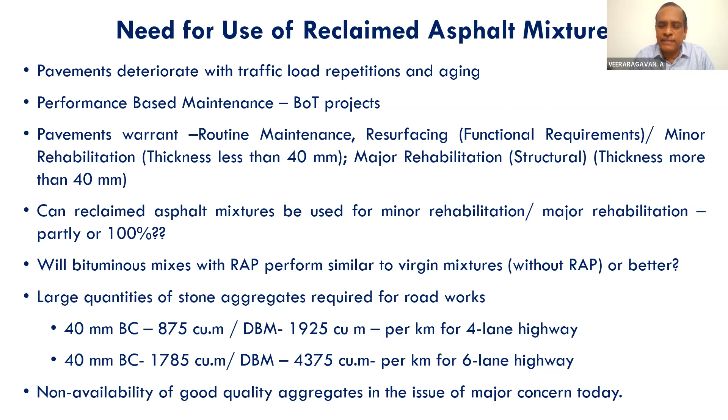As you know, a pavement condition will deteriorate with age. Initially, a preventive maintenance will work. A preventive maintenance will only delay or retard the rate of deterioration of the pavement, and that can be done when the pavement is in good structural condition.

But once it attains some more deterioration, it will warrant a minor rehabilitation. Minor in the sense the thickness of the overlay or treatment will be less than 40 millimeter. Generally it can be 25, 30, or 40, or even lower. Furthermore, when pavements deteriorate further, it will warrant a major rehabilitation.

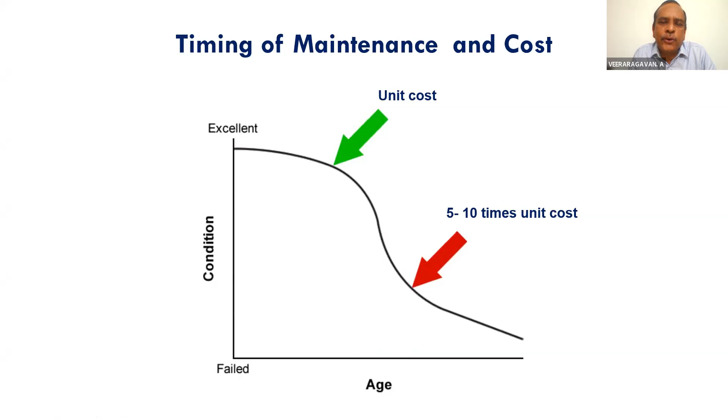But time is money. Once you try to do the maintenance much later than required, the cost may be, if it is $1, it will go up to 5 to 10 times more the longer you delay. The question arises: what is the right time for rehabilitation of the pavement with a reclaimed material? That's the question.

So when you look at this, you find that the pavement will warrant recycling at this point in time. Can you do it here? Can you do it here? These are other questions that have to be answered. Can you do it earlier? It can be done anytime, depending upon the distress.

So any pavement material that has deteriorated can be recycled and reused. If you do it much earlier in the life, maybe the top bituminous layer alone may have to be rehabilitated. Once you delay it more, along with the wearing course, the binder course may also need to be recycled. Once you delay it further, you may have to go to the lower layers - the wearing course, binder course, and base course. So there are different types of recycling.

Depending upon the time for maintenance and rehabilitation, the type of recycling to be adopted will also vary. When the pavement has totally failed, can it again be reclaimed? Yes, that is possible - we can go in for a full depth reclamation. For your information, nearly 5,000 kilometers of rural roads are being reconstructed using full depth reclamation.

Will it perform similar to a new pavement? There are issues and concerns here. So what are the reasons for rehabilitation? Number one, there can be an inadequacy in the riding quality. So generally what we do is, when the riding quality becomes poor, we provide a thin overlay. But remember, I mentioned at the beginning, we require more than 1,000 cubic meter of material for construction of 1 kilometer of a 6-lane highway resurfacing with 40 millimeter.

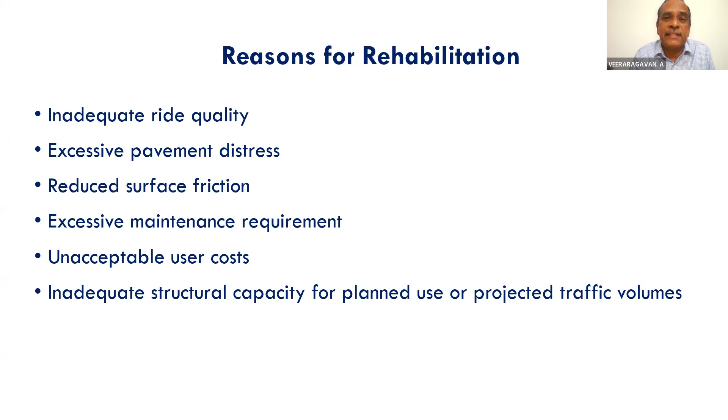But as I said in the beginning, depending upon the timing of the maintenance treatment, there are different choices for recycling. This recycling can be done in situ, which I call hot in-place recycling, or the milled material can be taken to a central plant - hot central plant recycling. Similarly, we can also go in for cold mix, which can be cold mix in place, or cold mix in a central plant.

Eventually, when the entire layer has deteriorated, I can also go in for full depth reclamation. So what you should learn is which treatment will work under what condition, how to do the mix design, and will the reclaimed pavement perform similar to or better than a virgin or new design. Selecting the recycling method becomes the major issue.

So there are several considerations to be made. Number one, the choice of recycling depends upon the type of distress. I'll show you a few photographs that will enable you to understand how the type of distress dictates the recycling technique that has to be adopted. Second, you have to consider the engineering aspects. Third, economics.

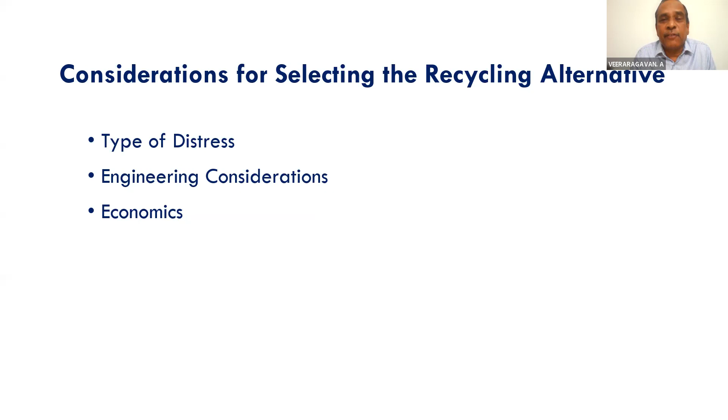If you look at the distresses in a pavement, it can be a surface distress. It can be a case of deformation - rutting, slippage, corrugations. It can be cracking. This cracking can be a case of load-associated cracking, non-load-associated cracking, or reflective cracking. And there can also be maintenance patches.

But remember, recycling is not the recommended treatment for all types of distresses. So if somebody says the riding quality is bad, I will recycle - need not be. I can have a cheaper alternative rehabilitation treatment. There is no one-size-fits-all design. This is where the engineering judgment comes into picture.

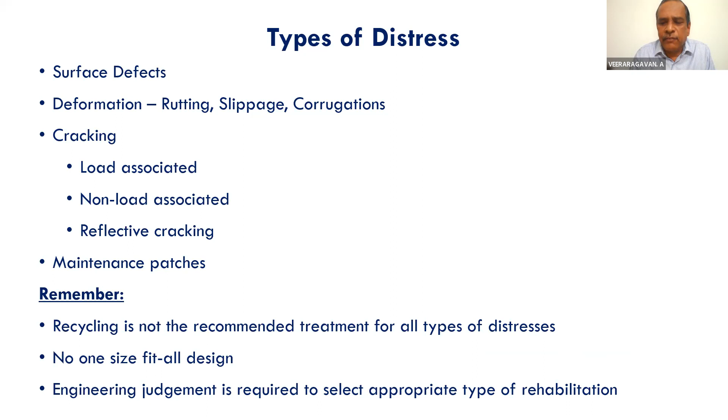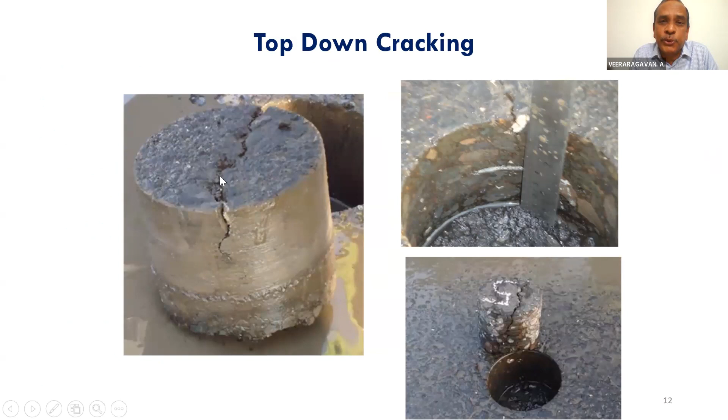It can be a top-down cracking. Does it require an overlay? What overlay? What thickness? If I provide an overlay above this, will this crack reflect through? Yes, of course. If so, what is the treatment? It can also be a case of block cracking.

It can be a case of rutting. It can be a case of rutting even before opening to traffic. Or it can be bleeding. So what you understand at this point of time is that there are different distresses. There can be a treatment for each of the distresses. There is no one-size-fits-all design.

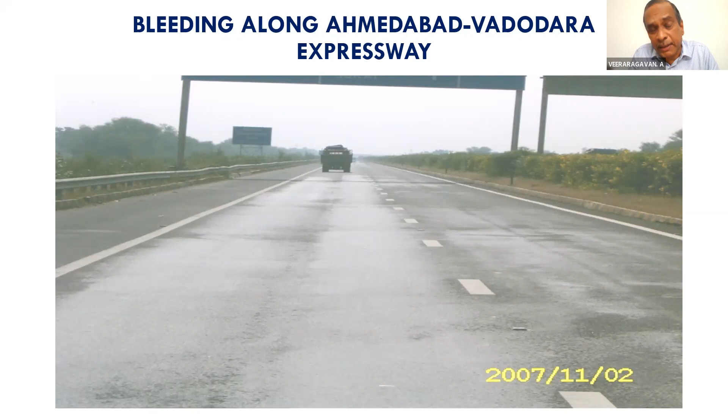Can all these be recycled? If I recycle the material and lay it, will it not bleed? Will it not crack? Will it not rut? Supposing you provide an overlay, what will be the comparative life between a conventional overlay versus a reclaimed material overlay in the bituminous mix? What dosage of RAP can be added? These are the issues.

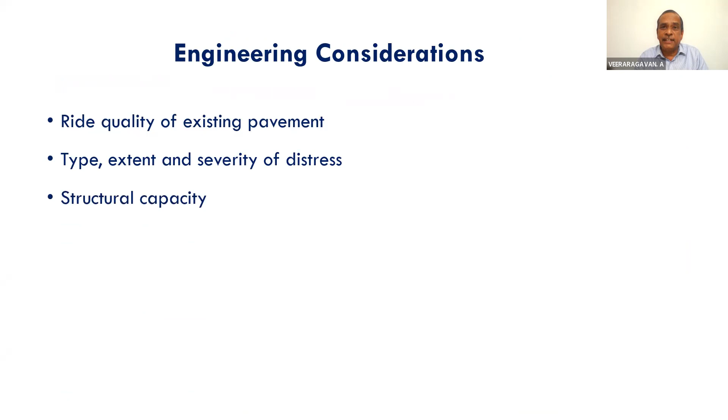Other aspects that have to be considered in the engineering are the riding quality of the pavement, type, extent and severity of the different distresses, structural capacity of the pavement, drainage conditions, age of the pavement, the remaining service life, as well as the design life that is required.

Suppose a pavement has developed distress because the subgrade is weak. Can I do hot in-place recycling? No. Can I do central recycling? No. Can I do cold in-place recycling of the top layer? No. So when there are problems with the lower layers, inadequate subsurface drainage, it warrants a different type of rehabilitation. There is no one-size-fits-all design.

At the same time, you should be able to evaluate the remaining service life and the strength of the existing pavement, and then accordingly design the RAP mixes.

In addition, there can be environmental issues, and material use in the existing pavement, because a pavement consists of different layers of different materials. So you have a cocktail of materials. How do you characterize a material? I am able to find in the schedule experts who are talking about binder characterization, mix characterization, modeling, etc. Perhaps you can pose more questions as to how you account for the various materials used in different layers, how to characterize them, and how to predict the life.

Also, when I want to do the recycling, I need materials. For example, for a cold mix, I need foam bitumen. I need a good quality emulsion. I need equipment. I also need experienced contractors.

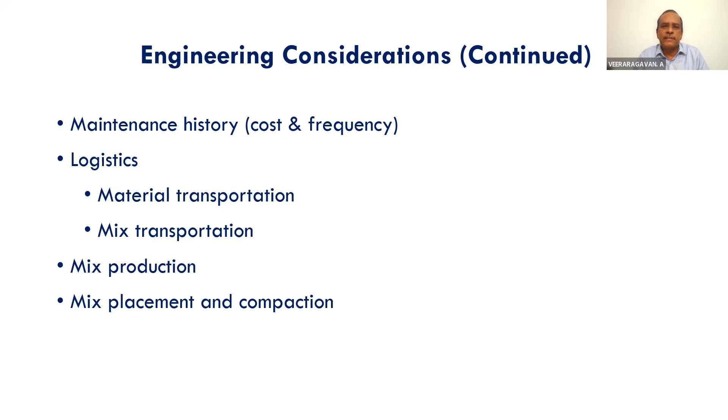In addition, the overhead clearances that are to be considered, the curbs and gutters, drainage structures, shoulder, median barriers, guardrails that are there - everything has to be relocated. There will be a change in geometrics. These costs should also be considered when you want to compare the cost economics of RAP mixes.

I'll just give an example of the issues and concerns when you want to recycle a bituminous layer. The bituminous layer, as you know, consists of a wearing course, a binder course, and a base course or lower binder course - I will call it an upper binder course and a lower binder course. The wearing course generally consists of a bituminous concrete or stone matrix asphalt, generally with modified binders. So the wearing course for national highways contains a modified binder.

It can be a crumb rubber modified binder or it can be a polymer modified binder. Again, there are different polymers being added, so this polymer modified binder will not have uniform characteristics. Depending upon the polymer added, its dosage, and the base bitumen used for production of the modified binder, its properties will change.

It's possible that the binder course, which we are now generally adopting, can be a high modulus base. The binder used in a high modulus base or high performance base is something different from a conventional viscosity grade or modified binder. If that is the requirement, now I have two different layers having two different gradations, two different binders.

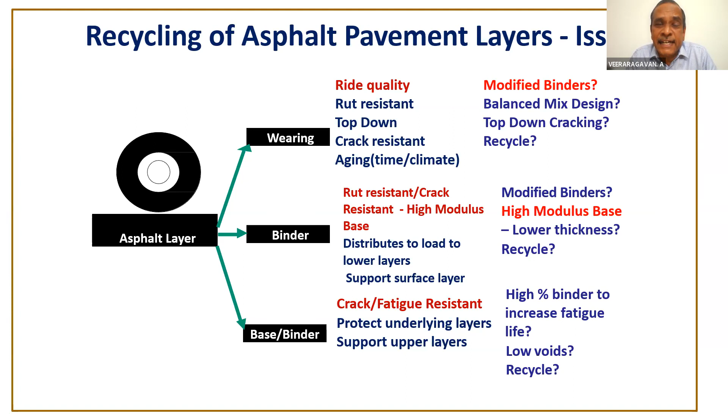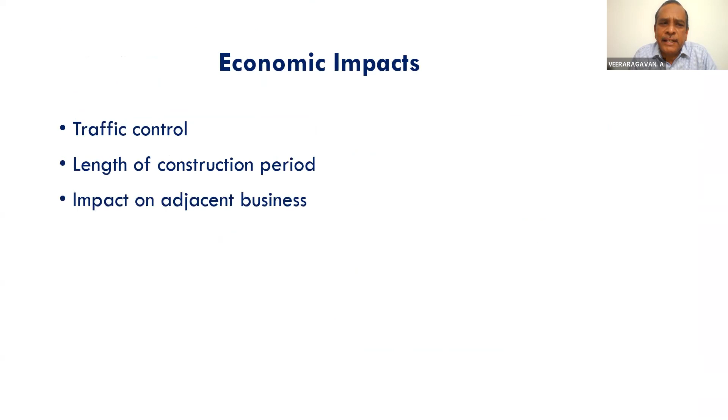If we come to the economic aspects to be considered: traffic control during recycling, length of the construction period, impact on business, utility relocation and interference, and other financial evaluation methodologies such as comparison based on initial first cost, net present value, annualized cost, cost-benefit, and finally life cycle cost.

So when I want to use a RAP mix, will the RAP mix perform similar to that of the virgin mix?

What is the rate of deterioration of this binder, by this RAP binder mix or RAP mix? Depending on the dosage of the RAP, the performance of this RAP binder mix will be different. So how do you predict the performance? What models? I'm sure the experts are there to talk about the modeling.

But remember, you are modeling only the bituminous layer. The performance does not depend only on the bituminous layer. It also depends upon the supporting layer. So do not model only the bituminous layer and call it pavement performance. Say binder performance, say mix performance. The pavement is a different animal.

It has got a base course. The base course can be a cement treated base, a bitumen treated base, or a granular base. The sub-base can be a granular material, or it can even be a cement treated sub-base. The subgrade can be a conventional granular subgrade, or it can be a stabilized subgrade.

So keeping the top bituminous layer constant, you cannot predict its performance and say the pavement will perform. You can say the mix will perform. I don't question that. But when you talk about pavement performance, you have to consider the supporting underlying layers

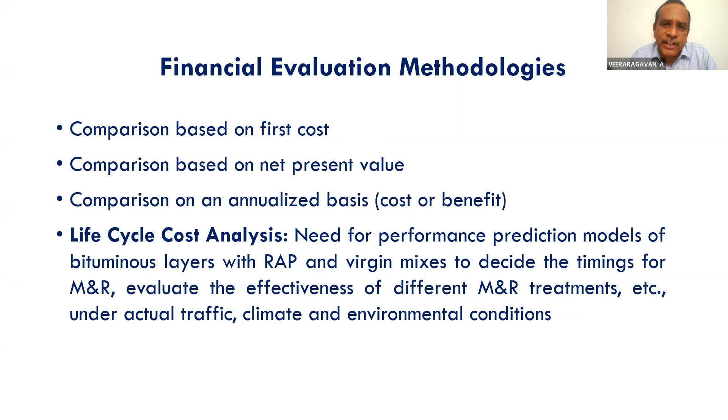as well. So we have to evaluate the effectiveness of this treatment so that we can adopt it in the years to come. If you look at the hot mix recycling central plant, you can adopt it when there are surface defects, deformations, cracks, or maintenance patching. But the percentage of RAP in a central plant depends upon the recycled mix properties as well as the type of plant. So again, you may do a laboratory mix design.

You can have 100% RAP as well. But will that be possible for you to mix in a plant? That's the question. So the designer should also consider the plant and its limitations, and design accordingly. You have to cut the leg to the shoe size. Depending on the plant capabilities, you have to design the mix.

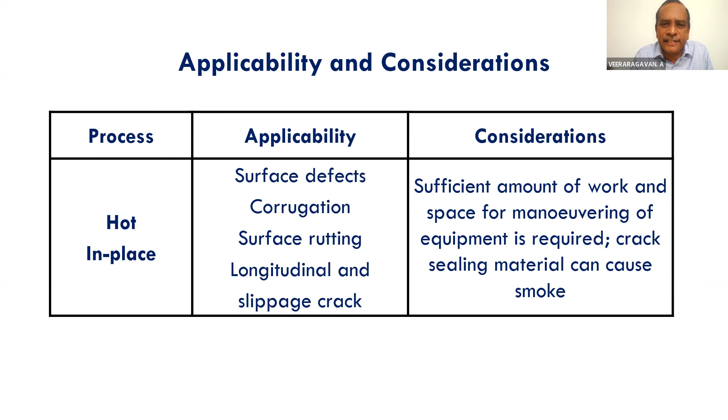It can also do an in-place recycling. Supposing there are only surface defects, poor riding quality, surface cracks, top-down cracks, corrugations - in such cases you can go in for hot in-place recycling. Sufficient amount of workspace is required. The equipment train heats the surface, mills the surface, there's a pug mill that mixes it, you add some virgin mix, and relay it again. It can also use a rejuvenator in that case.

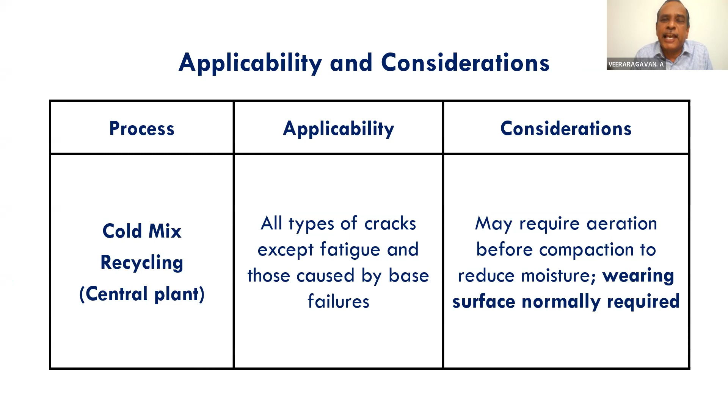In the case of cold recycling, it can be central plant - we can go down to the base course. Here's the problem with the base course: you can mill up to the base course. But when you do cold recycling, a wearing course is generally required because this mix will have higher voids and is expected to fail in rutting, not in cracking.

It can also be done for cold in-place recycling, where the problem is rutting in a sub-base or there are load-associated cracks - you can go for cold in-place recycling. It also requires a curing period, and it also warrants a wearing surface. So I can go for hot recycling or cold recycling, depending upon plant availability. I have to decide what type of mix recycling I can adopt, in situ or a central plant. There are advantages or limitations for each of these.

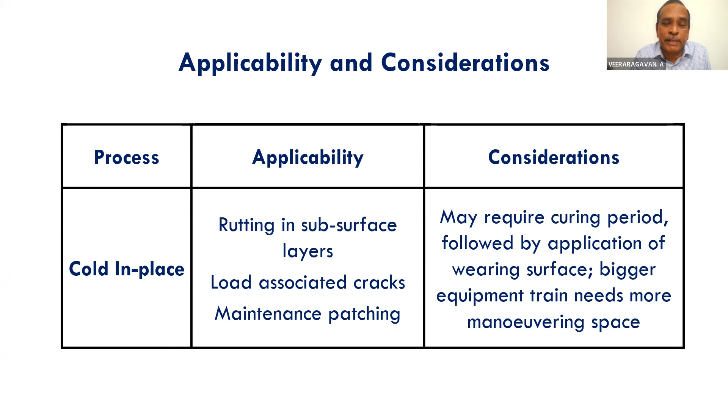I'm sure when you are discussing the mix design, you can understand how to link the mix design with the plant capabilities. I can also go for full depth reclamation, where either there's a problem in the sub-base or the wearing course, and we go in for full depth reclamation. This is what we have embarked on now in UP. Nearly 5,000 kilometers of UP roads are being reconstructed using the full depth reclamation technique with different stabilizers.

I do not know how far they will work. There are no guidelines in India, but we have gone ahead with full depth reclamation. Will it crack? Will it not crack? Do you need a crack relieving layer or not? Nothing is known. So we are just embarking on this, but maybe subsequently we'll be able to tell whether this FDR can be adopted even for national highways.

So what are the common barriers here? The common barrier when I want to use a RAP mix is quality concern - will it function better or similar to a virgin mix? Second, I get a RAP sample - will I bring it to the laboratory and do a mix design? Is this sample which I'm testing in the laboratory exactly what I will get in the field or not? If there is a change in the RAP mix gradation, how will it influence the performance?

There is a lecture also on the variability on RAP and its performance. Perhaps we can discuss further.

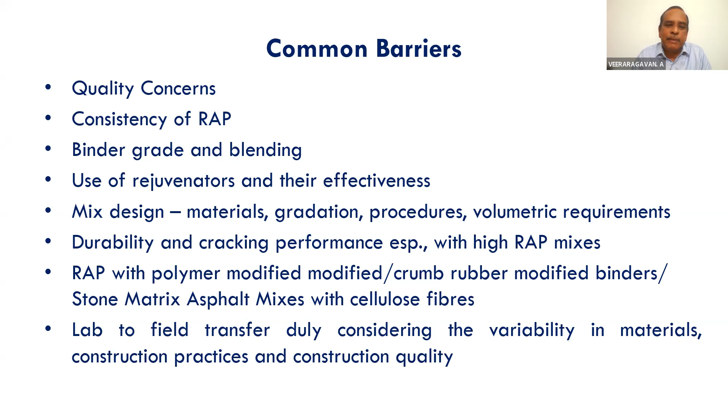Finally, the proof of the pudding is in the eating. When you transfer lab to field, you should consider the variability in the material, construction process, as well as the construction quality. What are the material-related issues?

What is the degree of mixing that will be obtained when placing a recycled mix on the road? This is the first question that has to be answered. But when you look at the degree of mixing, it depends upon the mixing temperature. As you know very well, the mixing, laying, compaction temperature varies depending upon the type of binder you use. Even between unmodified binders, whether it's VG30 or VG40, there is a variation in the mixing, laying, compaction temperature.

When you use a polymer modified binder, the manufacturer recommends the mixing, laying, compaction temperatures depending upon the properties of the modified binder. Now I have a binder which is neither modified nor unmodified—it's a combination of both. So theoretically, the laboratory can do that, but when you want to go to the field, what I found is that there are different types of polymers used in some road projects.

You name any supplier, he has supplied a modified binder. In a stretch of 240 kilometers which I studied, there were at least 10 to 15 different suppliers of modified binders, different polymers. It can be polymer, but different polymers, different dosages. So I may take 5 samples, 10 samples. Will these 10 samples represent the entire pavement section—that is the question.

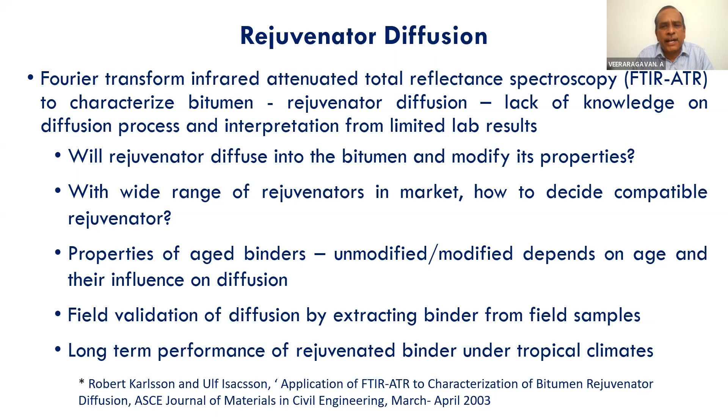So finally, what I would suggest is go to the field, to any site where reclaimed material has been constructed, bring it back to the lab, and check whether there is diffusion by extracting the binder and checking how much it has diffused. Long-term performance of rejuvenated material under tropical climate is something that needs to be studied further.

Other issues to be addressed are the volumetric properties. The percentage of RAP in a mix depends upon its contribution to the total mix, as well as the percentage of binder in the mix by weight. Second, it also depends upon the binder grade.

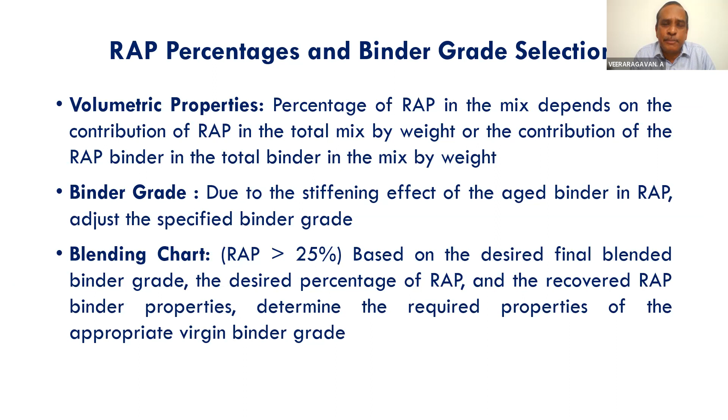There will be a stiffening effect from the aged binder. So will the aged, stiff binder become soft by adding a rejuvenator, or is it a case of using a softer grade of binder? We generally use a blending chart, so is the blending chart the only solution? A lecture on characterization of mixes will tell you how to find the suitable grading of the binder and aggregate, so the finished product performs similar to or better than a virgin mix.

The issue at this point is sampling. Sampling involves taking a random sample. If you go to a stockpile, you'll find that aggregates are segregated, with too much fines in some areas. If you take a sample here and characterize it, it will have different properties than if you characterize a sample from elsewhere.

In the laboratory, at most how many samples can you test? 5, 10, 15? But imagine the quantity of material being recycled at the site. What percentage of the RAP mix do you actually study in the lab? Will you be able to predict the field variability? That's another question. You test individual samples and check gradation variability, and this sampling test frequency depends upon the amount of RAP used in the mixture.

For example, when milling material, I may be milling material constructed 20 years back. I do not know the source of the aggregate, but today I consider that aggregate and the aggregate I'm getting today to behave similarly. There will be a variation in the gradation properties.

Similarly, another challenge is finding the bulk specific gravity of the RAP aggregates. This RAP and virgin aggregate bulk specific gravity is needed in volumetric calculations. The aggregates will contain a small amount of unextractable binder, and there will be issues of wettability and water absorption. So be careful when working out the volumetrics of RAP mixes.

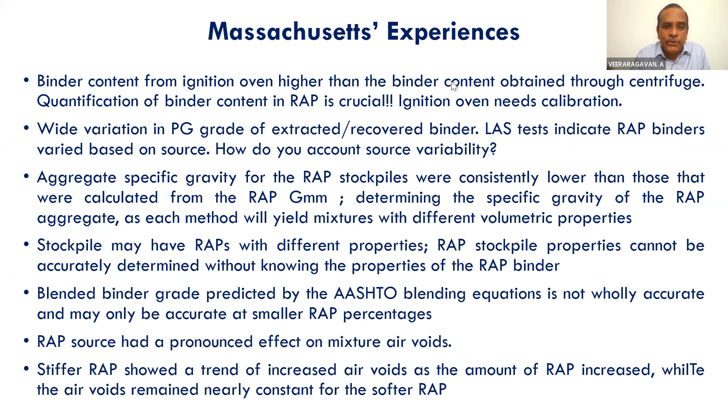This binder will have a profound effect on the mixture air voids. Therefore, even though theoretically both virgin mix design and RAP mix design follow the same process, the materials and binders are different, and hence the performance will also be different. A stiffer RAP shows increased air voids that will influence rutting properties.

Studies found that RAP source, virgin binder source, and percentage of RAP had a significant effect on performance. Be careful when characterizing these properties. We also need clear criteria to precisely determine which mixtures are balanced and which are unbalanced.

So there are some variables. Will it work at low, medium, or intermediate temperature? We test at one temperature, rutting maybe at 60 degrees, cracking maybe at 25 degrees. How will it perform at intermediate and low temperature? These are questions you have to understand when characterizing a RAP mixture.

The assumption of 100% blending between RAP binder is inaccurate. Once you vary the dosages from 10, 20, 30, 40, 50 percent, you'll find the mixtures behave differently. Degree of blending is a function of RAP content, source, and properties. Just imagine a case of material variability.

Samples were taken from different stockpiles, A, B, C, and D, some uncrushed and some crushed. You find wide variation in the 75 micron passing, which contains a higher percentage of binder. That will dictate your binder content determination as well as performance.

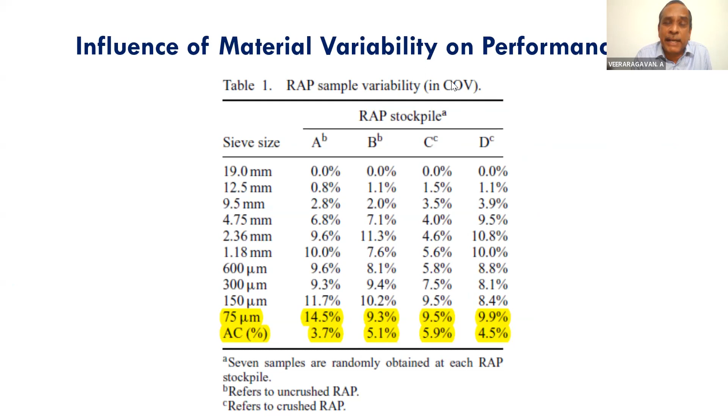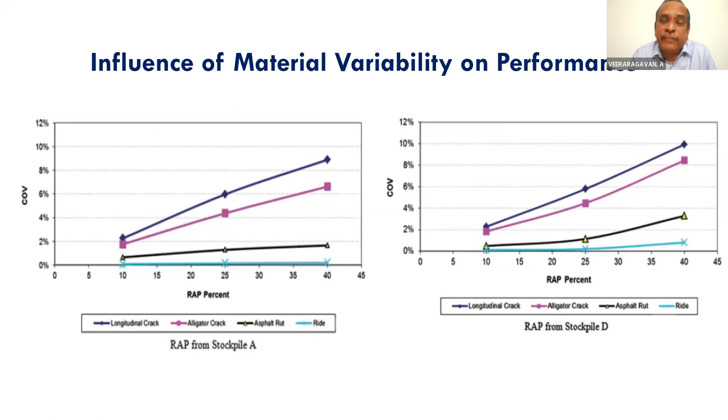How does it influence things? If you look at this variability, assume I have 40% RAP, you'll find a wide variation in performance. The top line is longitudinal cracking, the pink line is alligator cracking, and the black line is rutting. As the dosage of RAP increases, the performance widely varies. Therefore, be careful when you talk about high RAP content.

If you look at the assumptions, complete blending is assumed to occur between virgin and RAP binder. Is that true? You have to ask this question. The amount of blending is somewhere between complete blending and no blending. How do you find it?

From lab blending to the field, in the lab you can do anything, but the field is different. Will a rejuvenator really modify the binder properties? There is no method to determine the amount of blending that occurs in the field. You can bring a sample and check later, but that's post-mortem. Suppose you find the dynamic modulus, does it tell you whether proper blending has occurred just from the mixture properties?

So the findings and tall claims we make are based on laboratory studies. You need to find out the field variability and then fine-tune your findings. Blending charts are used, but if blending charts are used, it's time consuming. You have to extract the binder using hazardous solvents.

Is that the right method? Look at how many agencies, even in India, how many laboratories are available with facilities for extraction, recovery, and binder testing? How many labs are available in India for the dynamic modulus test? If so, how are you going about it? That's the issue, we still follow the Marshall method of mix design.

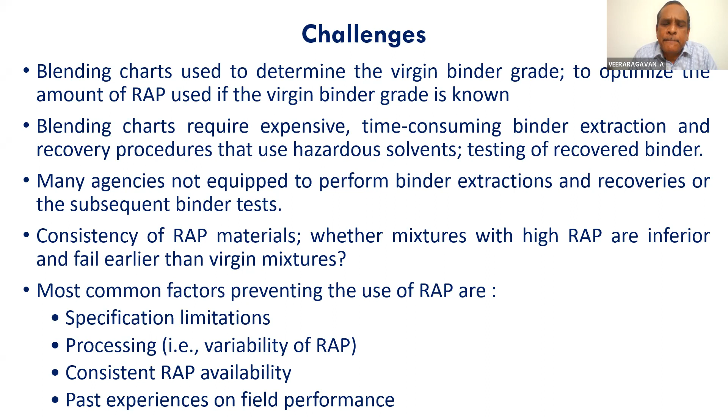Consistency of RAP materials is another issue. There are specification limitations, processing issues, variability of the RAP, consistent RAP availability, and lack of past experience or field performance data. So if you look at field experience, this is one site I know which was constructed with RAP in the wearing course.

Within 3 years, it developed cracks. What is to be done? Now they have laid a bituminous overlay with a glass grid. Now I have a material in this layer.

If I want to recycle again, I have a lower layer of bituminous concrete with RAP, a glass grid layer in between, and a bituminous concrete overlay with a modified binder. How do I characterize this? How do you recycle a layer which has a glass grid? These are issues that need to be considered.

Quality of the blended binder and RAP binder properties play an important role. The mix will get stiffened, so cracking will be an issue in the case of aged binder, but check whether a rejuvenator really softens the binder. A high RAP content may affect binder properties in an overly stiff mix, which may not be resilient and may develop cracks prematurely.

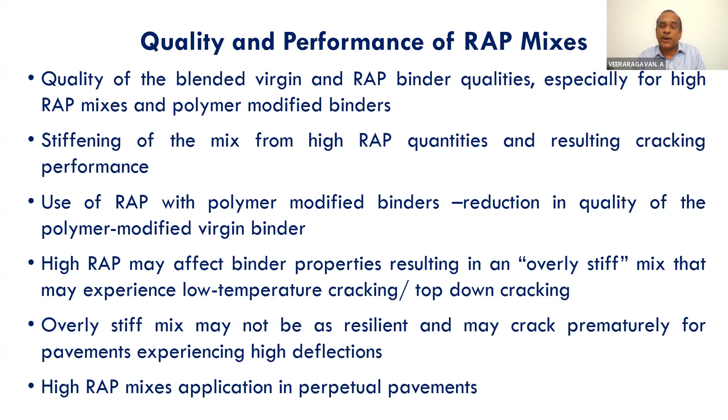Therefore, high RAP mixes, even though theoretically they may work in the laboratory, you have to be cautious when you use them in the field. So the points to ponder are fractionation, binder content in the RAP, mix design, virgin binder grade, whether it should be viscosity grade or performance grade, plant restrictions if any, and use of warm mix as an additive. If so, how will it perform?

We propose a revision of the MORTH. I am a member of the task force. What we try to do here is that with RAP, we want to be cautious. The amount of RAP is supposed to be 20% or less. The virgin viscosity grade of virgin binder shall be the same if the percentage of RAP is 20% or less. When it is 21 to 30%, the virgin grade binder should be one grade softer. For example, if you use VG30 in a virgin mix, use VG20 grade for the recycled mix.

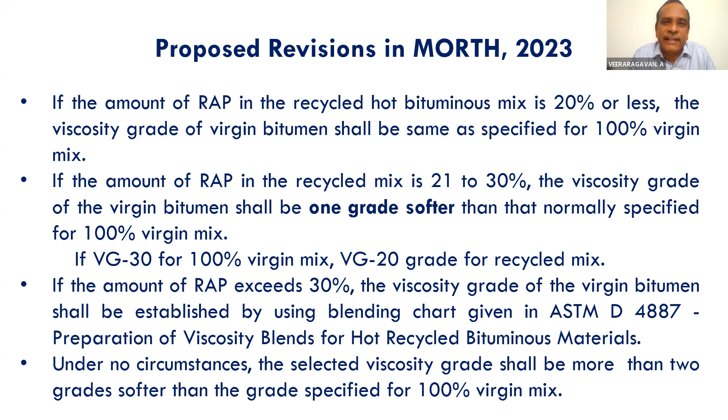You can discuss this when you talk about characterization of the RAP binders. If the binder RAP percentage exceeds 30%, viscosity grade of the virgin binder shall be established using a blending chart. Under no circumstances shall the selected viscosity grade be more than two grades softer than the grade specified for the 100% virgin mix. VG40 means you cannot use VG10. So these are issues of concern. Why and why not? Perhaps you can discuss further when you attend the lectures on characterization of the binder.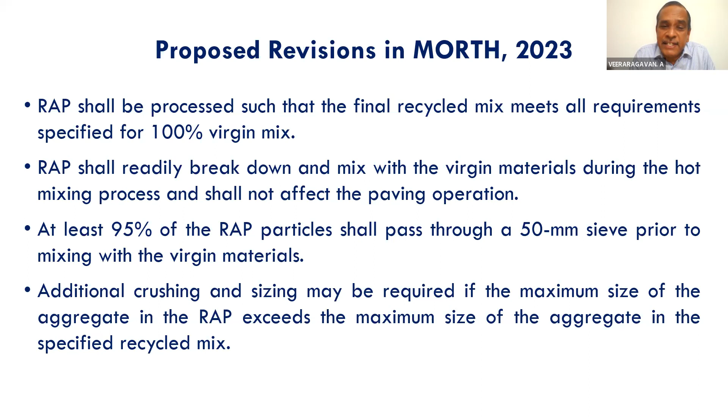We also say that RAP shall be processed such that the final recycled mix meets all the specifications like a 100% virgin mix. The RAP shall readily break down; at least 95% of the RAP particles shall pass through a 50mm sieve prior to mixing. If not, what? That's another question. Additional crushing or sizing may be required if you find larger aggregates.

So we say that till we get confidence, we want to restrict the RAP in a recycled mix to 20% in wearing course and up to 50% in binder and base course. But again, if the binder is not properly characterized or the mix is not properly characterized, it will bring a bad name to recycling. Therefore, be cautious when you try to characterize the binder or the mix.

At least 5 random samples can be obtained. Determine the blending proportion. You can find what binder is available in the RAP. Accordingly, you can reduce the virgin binder content when you want to do the RAP mix. So these are something that we have brought in the 2023 specification, which will come out.

The second part is cold recycling. As you know, there are a few lectures on cold recycling. I don't want to go into more detail about the aspects of manufacture of the bituminous stabilized material, but what I would like to say is that it's in between a bituminous material or unbound material and the bituminous material. Asphalt concrete is on one end, which is a relatively high stiff material, compared to unbound material. So the issue arises at this point of time: when you add binder, or a mix consists of binder, will it behave like an unbound material or will it behave like a bituminous concrete? This is where there's a question of debate that has to be done.

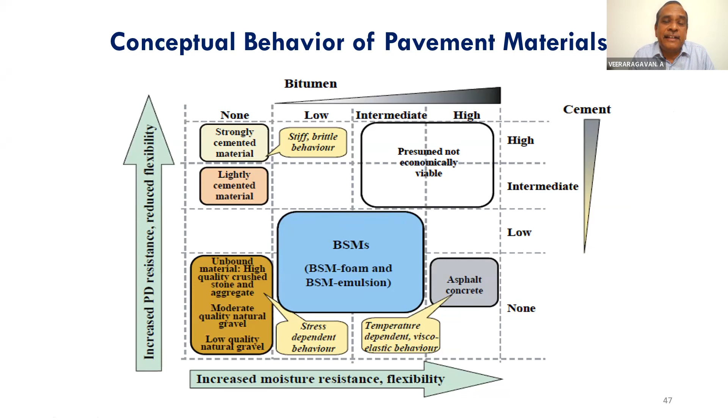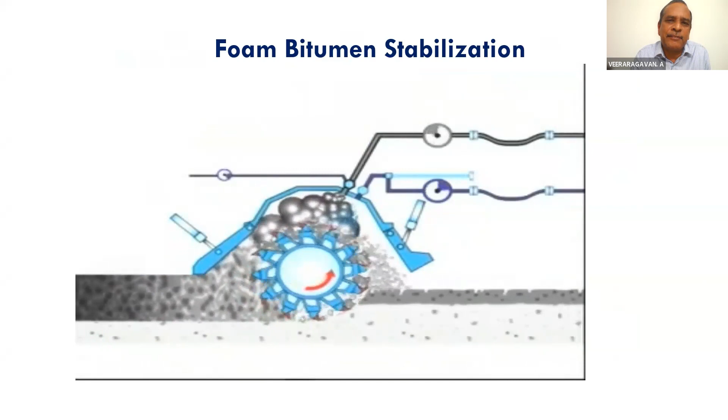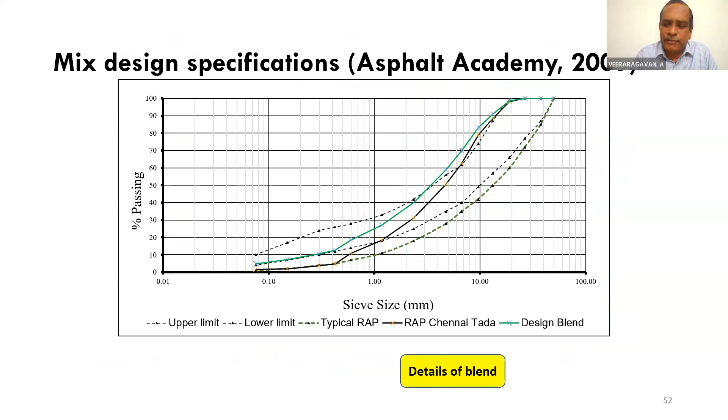So for cold recycling, let me quickly take you to the field. What we had done - the first cold in-place recycling project in Chennai Tada Highway - the mix design specifications were as per Asphalt Academy. We had a major problem: we found the variation between lab and field.

We found through the laboratory mix design, brought the sample to the laboratory, tested, and found the mix needs about 19% of the crushed dust. We set the cement percentage at 1%. We decided the dosage of water. Everything about foaming characteristics, we studied. But when we went to the field, the lab mixes, when translated to the field with different roller passes, we found the density achievable is different.

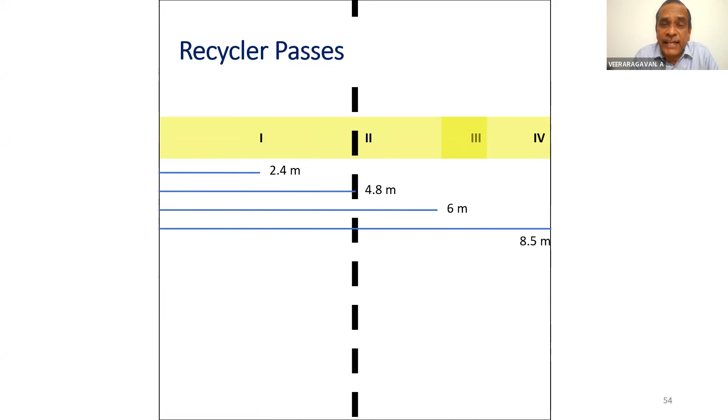The major problem that we faced was the variation in the gradation of the quarry dust. When there is a wide variation of quarry dust, the mix will not behave as predicted in the laboratory. How do you account for this variation? How do you predict this? This is something you have to ask the faculty delivering the talk.

When you talk about the wide variation in quarry dust, we find that we can study this in the laboratory as well. What is the variation of cement content? What will be the variation of strength gain? Will there be a variation in density with the variation in gradation of the dust? What is the variation if you are not able to foam in the laboratory as you did in the field?

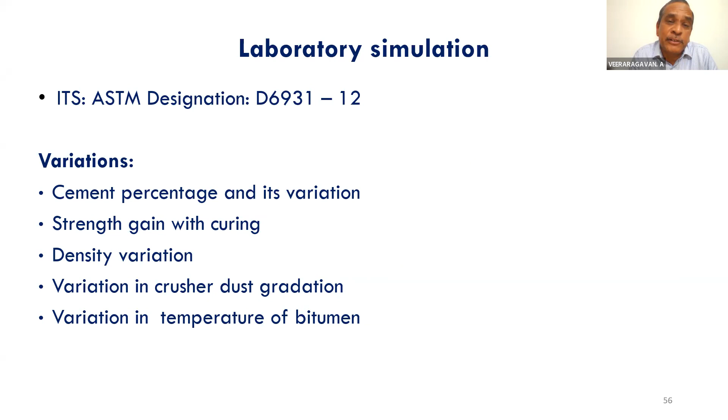This is exactly the same problem. We could not maintain the temperature in the field as we maintained in the lab. If so, the mix you get in the field is entirely different from that of the lab, and hence the problems will also be different. So when you try to simulate this, you find different samples at different locations, with wide variation in compaction due to blending variability from the gradation variability of the dust.

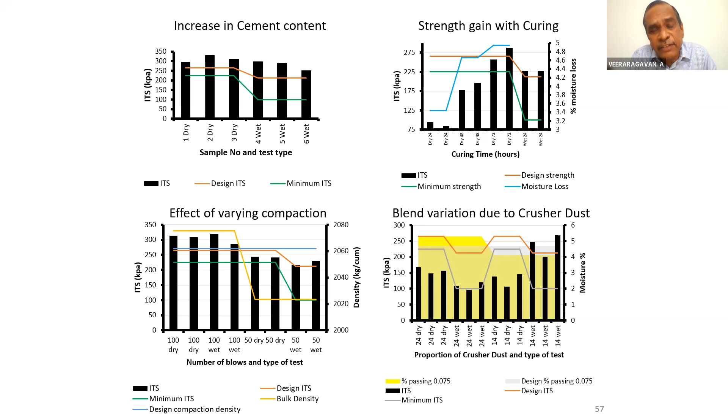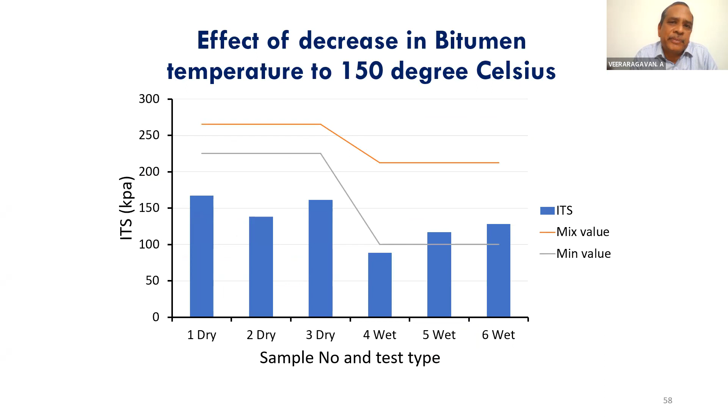So the sensitive ITS test, varying one parameter while keeping others constant, cement content and its effect, laboratory and field procedure - this is something that needs to be studied when you want to model the performance of the cold mix. We try to study the performance in the field, so I always go from field to lab.

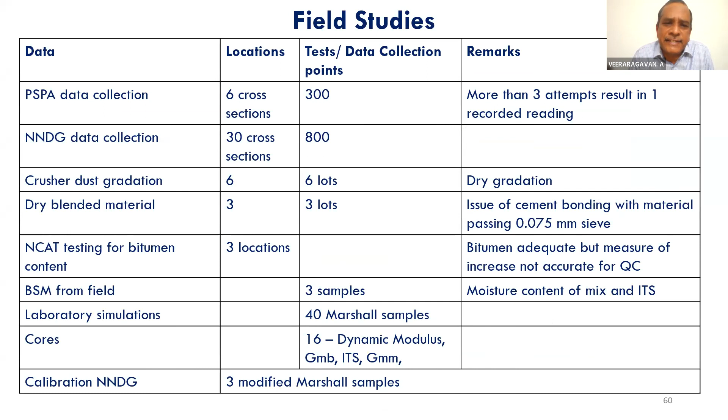Different NDT tests were used. The pavement seismic performance analyzer was used, and nearly 300 tests were carried out. A non-nuclear density gauge was used to find the density, and NCAT was used to find binder content.

What is it that you finally try to find? What you try to find at the end is that as you move offset from the median, the density value widely varies. Remember, in the laboratory you get one maximum density, and you say that is the optimum binder content or optimum moisture content. But in the field, when you go, you find a wide variation in density.

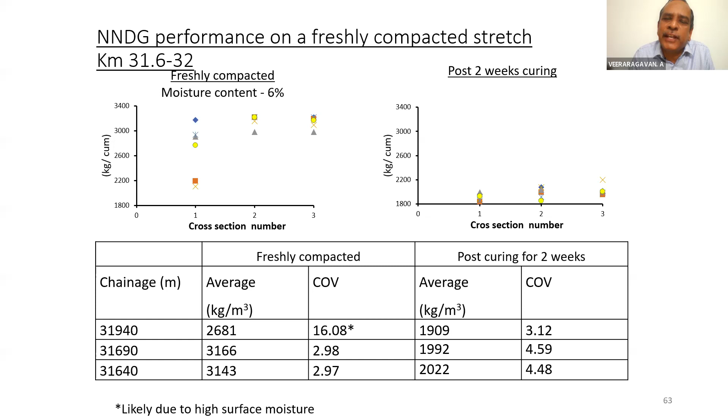You'll find that at freshly compacted and post-cured stages, the mean density as well as the standard deviations widely vary because of construction aspects. Do we consider them in the laboratory? No. The proof of the pudding is in the eating. How do you account for this variability in construction when modeling the performance - this is something that has to be explored.

You even find density variation along the lengths and across the widths - you will not get uniform density. That is why you find cracking in some locations, but no cracking in the adjoining section 10 meters away. How do you account for this variability in modeling?

You can characterize the binder separately and the mix separately, but how do you account for the variability in construction when characterizing binder properties and mix properties? The binder you get in the laboratory may be different from the binder you get in the field. The mix produced at the site, constructed to a different density, will have a different modulus.

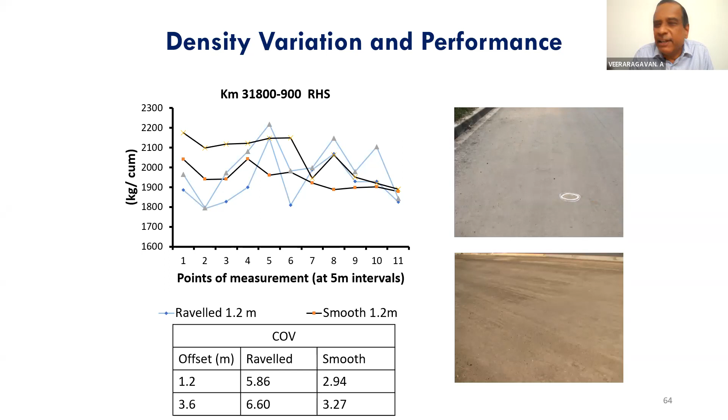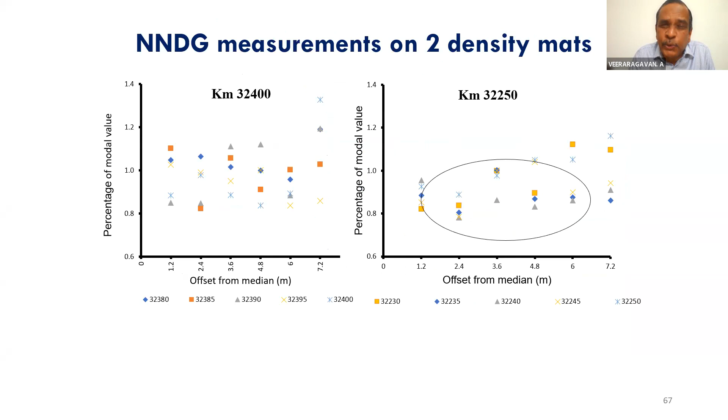Similarly, you find density variation across the section at 5-meter intervals - wide variation will be there. So if you took a grid and studied the density variation along the length and across the widths, you'd find that non-nuclear density gauge density values widely vary. Do you consider this? That is the question.

So if we also use the PSPA to find out the seismic modulus, you find again the seismic modulus widely varies even at the same chainage. How do you account for this variability from the lab studies? This is a million dollar question that has to be answered here.

Even along the length, from one end of the median to the other, from 0 to the 7-meter width of the pavement, you find wide variation in the modulus values. You can bring one mix into the laboratory, do your dynamic modulus test, and then try to predict the performance, but that doesn't work. How do you account for this variability?

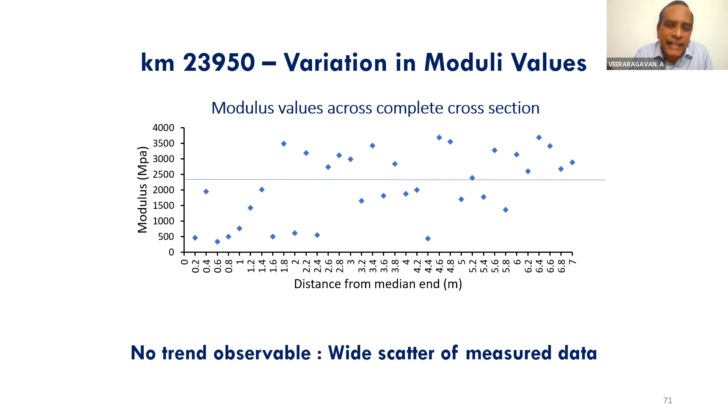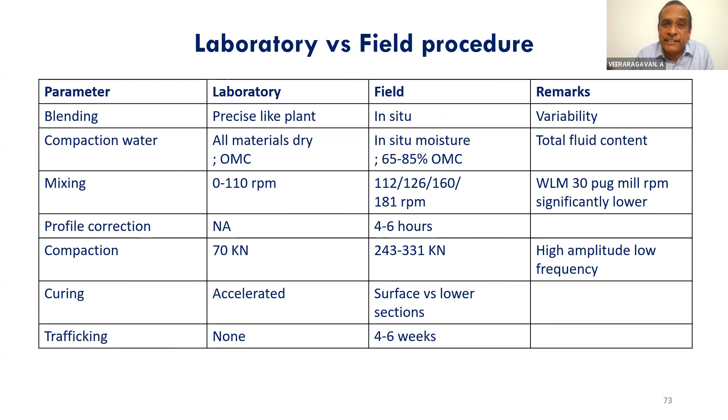Mix design is the same, but the modulus values are different. How do you link the laboratory modulus to the field modulus? That's the question. Similarly, density measurements also vary, and modulus value also varies. So we find there's a wide variability between the lab and the field. Therefore, be cautious before making tall claims that this will work and that will not.

For the core test, we find there is a wide variation even in density, with the top, middle, and bottom slice and two halves showing variation in air void distribution. There's also a variation in the ITS value between the top and the bottom, but we get only one number in the laboratory. How do you consider that?

Because field compaction is different from lab compaction, even the dynamic modulus values of field cores are different from those of laboratory cores. This is because the equipment used in the field is different from what we use in the laboratory. You may get a higher modulus, but can you consider this modulus in pavement design?

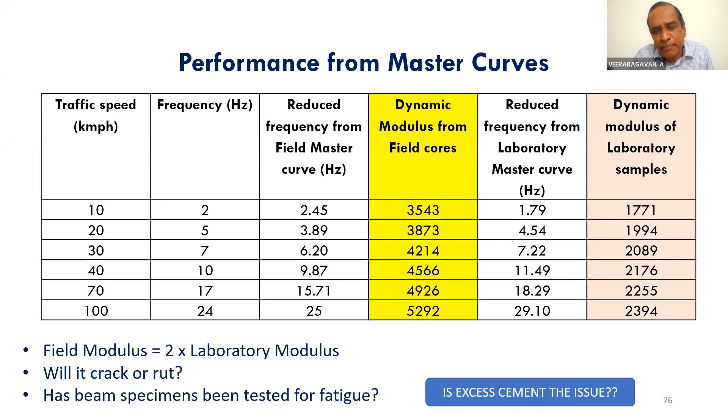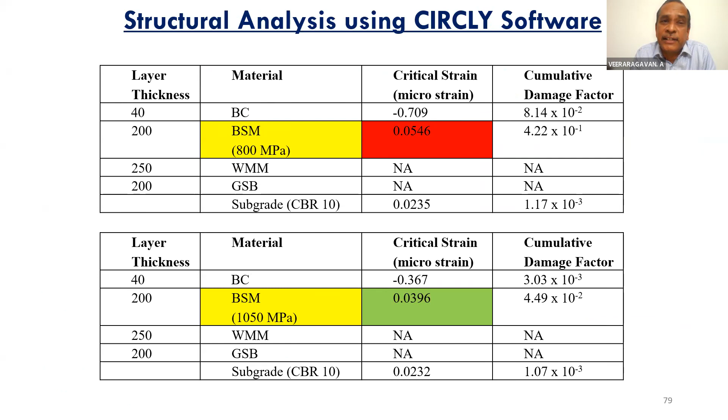That's the question here. So we find the ratio between the seismic modulus and the dynamic modulus, and we find that the modulus values vary at different stages of the binder. We find that when you consider 800 MPa as the modulus, the pavement fails, but when you consider 1050 MPa, it passes. So there is a wide variation of modulus. Which modulus should be considered in the design is the question here.

Durability - when you talk about this, it's a non-continuously bound material with partially coated aggregates above the size of 300 micron. So there are flexible spot welds. Is it a bituminous material? Will it crack? Have we studied this?

But if you look at recent studies carried out in India, it gives a modulus value of 2260 MPa, density of 97 to 102%, Gmb of 2.4. So it behaves like a bituminous layer. If so, you should study the BSM material for cracking. Do we study this? Has anyone studied the fatigue behavior of BSM mixes? If so, what is the allowable strain value for a BSM mix?

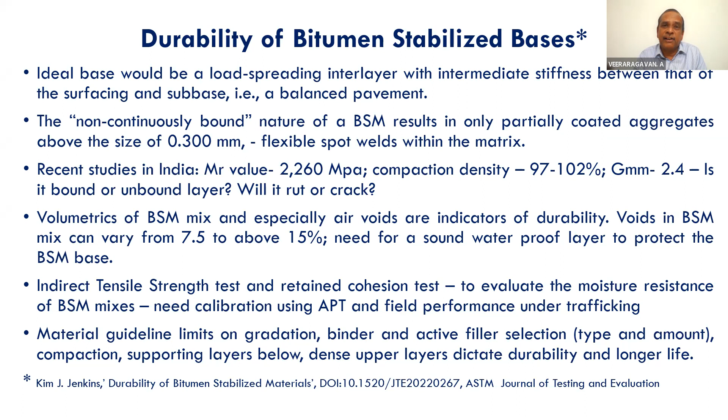We find here from this paper by Jenkins that the RAP percentage varies, and the voids vary as high as 16.6%. Is it a bituminous layer or is it a granular layer? This is something that needs to be addressed here.

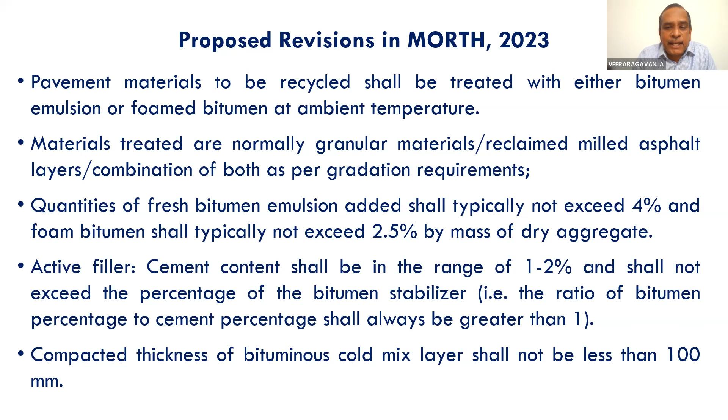In the proposed specifications of MORTH, what we are saying is that material to be recycled shall be treated either with emulsion or foam bitumen - they can be granular material. The quantity of fresh bitumen emulsion typically should not exceed 4%, and foam bitumen shall not exceed 2.5% by mass of dry aggregate. Cement content should be in the range of 1 to 2%. The percentage of bitumen stabilizer shall not exceed the percentage value, and the ratio of binder to cement percentage shall always be greater than 1. Compacted thickness shall be around 100 millimeter, not lower than 100 millimeter.

So what we need is research on restricting the use of certain types of RAP only for ideal types of asphalt mixtures. Can RAP form any one bituminous layer? If you have several layers of bituminous pavement with different binders, how do you characterize them?

Limits on the rejuvenating oil - it can be bio oil, it can be any oil that can be used. What is the choice of oil? How do you know that it rejuvenates the binder? How do you consider the performance of aged polymer modified binder from RAP and its compatibility with the normal paving grade? What is the influence of fluctuations in RAP characteristics, and how do you model it?

Applying rules relating to the final binder properties with new and old binder - when you try to use specialized binders, how do you form the rules? What is the allowance of RAP consisting of natural rubber modified binder, crumb rubber modified binder, and polymer modified binder? Structural design rules used for RAP may not be valid like virgin mixes because of the binder and its variation in properties.

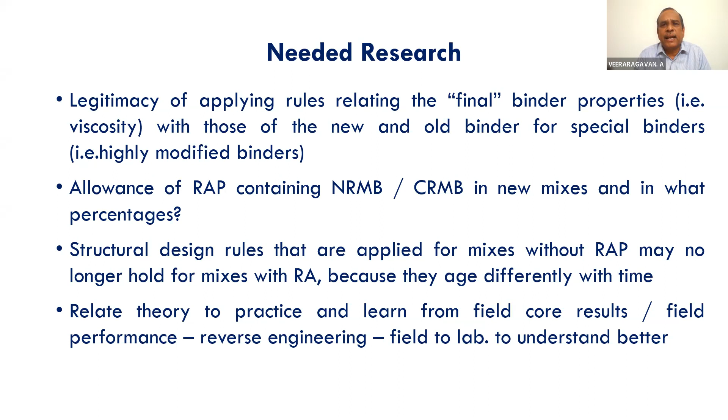So relate theory to practice, learn from the field, and then go to the model, go to the lab from the field. So in summary: lab tested material property and the consequent design vis-a-vis built material property - this should be used as an input in the design and to predict performance.

So you should try to validate the laboratory results. Laboratory results are far, far away from reality. Construction translates the design into reality. Lab tests as well as APTF do not simulate the field conditions of actual traffic, climate, and environmental conditions. Field performance is the key as it considers in-situ construction quality.

My solution suggestion is to come from field to lab. Try to go to the field, to any section that has been constructed with RAP mixes, and study the properties. Then what you try to do is get the performance data. How is it performing? If it's performing, what rehabilitation was adopted - cold, in-situ, or central plant?

What are the binder characteristics? What are the mix characteristics? What are the models and the values? If I have to get this performance, I need this technique. Does this technique work? If so, how should I construct it? How do you reduce the variability? How do you consider this variability in mix properties in the design process, and how do you consider the material property that will give me the strength and also the performance?

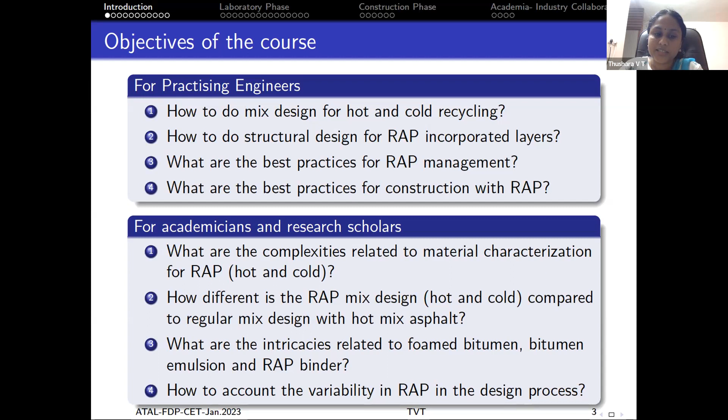Now, for whoever is in academics and whoever is doing research in this particular area, they will be identifying the various complexities related to material characterization of both hot as well as cold mix, and the different aspects of RAP mix design compared to regular mix design will also be covered, and the intricacies related to possibilities like foamed bitumen, emulsion, etc. will also be clear, and we can also come up with strategies to account for the variability of RAP in the design process.

So this is the introduction slide on recycling. You're now well aware of the recycling process. Basically, after the service life, these milled surfaces are reused for various layers.

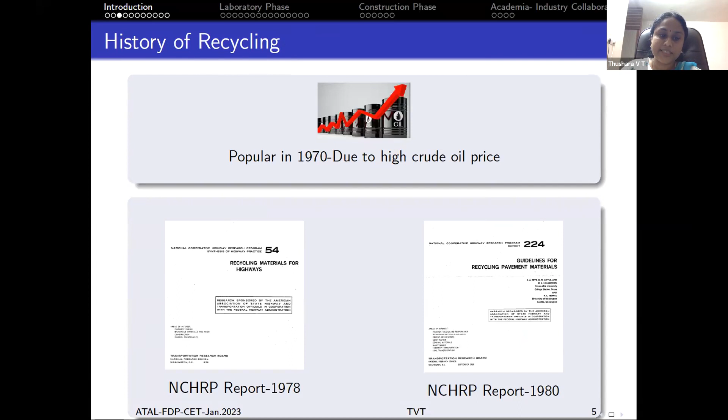Now let us speak about the history of recycling. It became popular around the 1970s because of the high crude price. The first reports related to recycling were published by NCHRP in 1978 and 1980. However, the Superpave mix design, released in the late 90s, did not provide guidelines to include RAP in HMA.

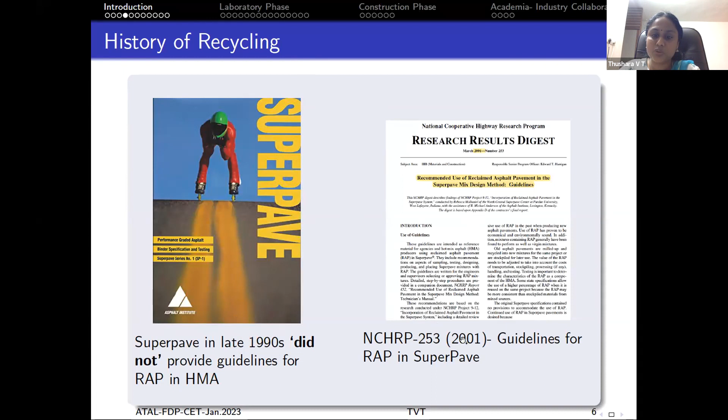Because of that, it did not become popular in those areas for mix design. The inclusion of RAP in the Superpave mix design was incorporated in NCHRP Research Digest 253, released in 2001. Most guidelines limited RAP usage to 15%, because of high variability as well as high fines content. Also, there were no incentives given to the construction agencies in charge, so there was not much progress in the implementation of recycling.

However, after 2006, the scenario changed with more emphasis on green technology. From there onwards, we see a lot of literature related to pavement recycling, including guidelines from NCHRP reports, the South African Sabita guidelines from the Asphalt Academy, and Indian guidelines that have also introduced the inclusion of RAP for both hot mix and cold mix recycling.

The scenario of recycling in India, specifically related to specifications and other aspects, will be covered in tomorrow's first session by Professor Sudhakar Reddy of IIT Kharagpur.

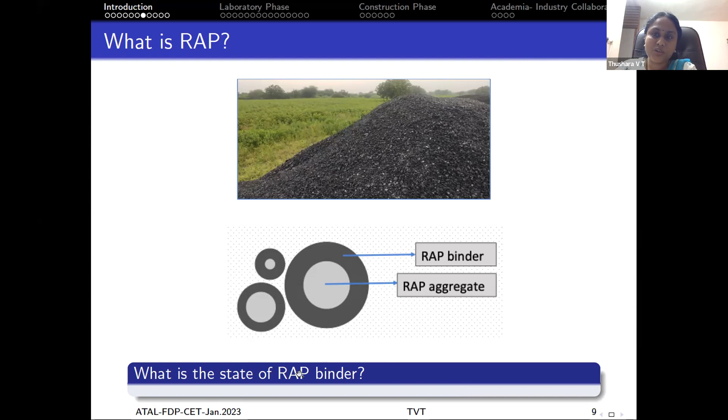Now let us go again to what exactly RAP is. Basically, it has RAP aggregate as well as RAP binder, and the RAP binder is an aged binder. That aging depends on climate, service life, the amount of penetration, and other aspects, as well as the thickness of the RAP binder on the RAP aggregate. So there will be variation, and we have to deal with the current state of RAP binder to incorporate it properly in the mix design.

Based on various technologies, there are different types of recycling, as discussed by Professor A.V. sir. Recycling can be based on location as well as production temperature. Based on location, it is in-place or plant recycling. Based on production temperature, there can be cold recycling, half-warm recycling, warm recycling, as well as hot mix recycling.

Now, what we are focusing on further, the way forward, is to know whether we have to consider the mix design containing RAP differently, or if it can be the same. This query was also posted in the chat box. And what is the practical upper limit for the RAP content?

As I mentioned, it was earlier limited to 15%. Now the codal provision is up to 30%, but up to what percentage can we actually go in increasing the RAP content? We have to explore that further. Ideally, we would want to go with 100% recycling, but if there are roadblocks or challenges in increasing RAP usage, we have to explore those as well.

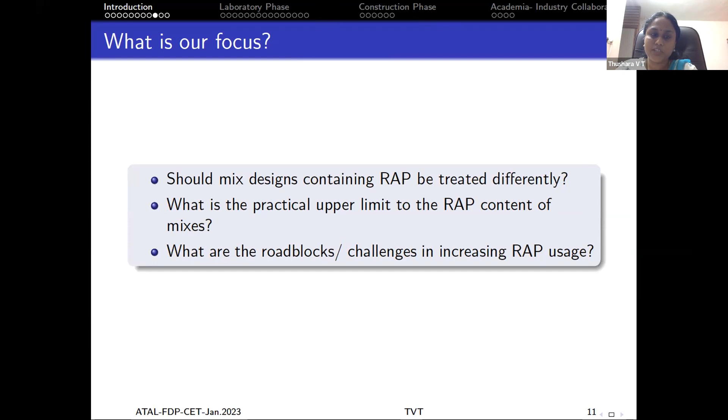For that purpose, we have to go a little deeper into the details of what exactly happens with different methods like cold mix, foam stabilization, etc. We should take a closer look into the internal structure, what is happening with the various technologies, and what happens related to volumetrics, air void distribution, and so on.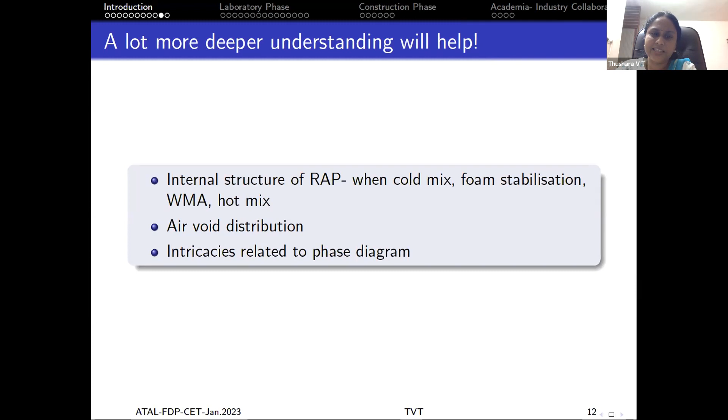There is a concern that when we go for RAP mixes, the air voids are found to be higher compared to regular HMA. So what exactly is happening there? Such aspects have to be explored further, along with the intricacies related to the phase diagram, as mentioned earlier, the specific gravity of RAP material, and how to incorporate all of that properly. Some of these aspects will be covered in tomorrow's talk by Professor Murali Krishnan of IIT Madras.

Now coming to hot mix recycling as well as cold mix recycling, we have to come up with certain assumptions. So what is the residual binder after hot mix recycling? There can be different scenarios - a black rock scenario, or full blending or partial blending. So what is exactly happening and what we are assuming, whether it is correct or not.

For example, if we are assuming full blending, and if the RAP binder is acting as a full black rock, it is not activated, what will happen? How will the mix behave? There are aspects related to that we need to understand. Normally the scenario is generally partial blending, and we need to identify such aspects. Then normally in cold mix recycling, we consider black rock with no binder activation, because we are not heating it.

Now, depending upon the amount of activation, what is the target binder grade that we are expecting is to be understood, and accordingly we have to provide the fresh binder. That depends upon the amount of RAP percentage incorporated in the mix. As per the guidelines available, as per the NCHRP report, it is connected to the percentage of RAP and the recovered RAP grade. Normally the amount is limited to 15%, because we don't have to extract the RAP binder and characterize it. If we go beyond 15%, we have to extract and identify the recovered RAP grade, and accordingly come up with the virgin binder grade to achieve the target.

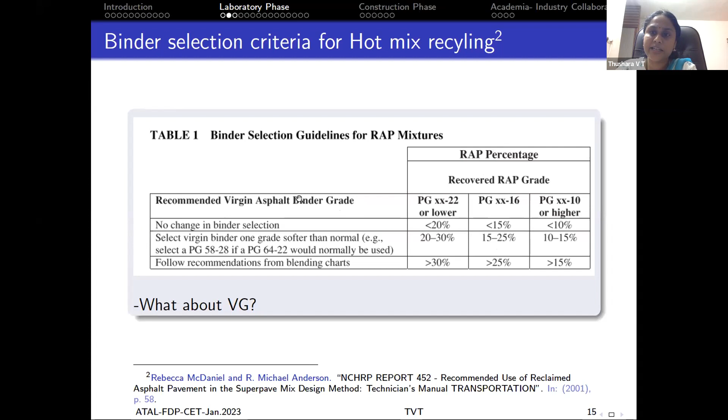Such aspects will be covered in the RAP binder characterization session on day 3, session 1, by Dr. Nivitha of PSG Technology, Coimbatore.

Now coming to emulsified cold recycled mixes - how to go about with the mix design? What are the various ingredients related to that for the emulsified cold mixes? How well we have to identify the various components - such aspects have to be dealt with in detail.

And coming to cold mix, as discussed earlier, how to characterize it? Whether we have to characterize it as a granular material or as a bituminous material - that is something, as sir mentioned, that is a talk of debate, and we have to identify how actually it is behaving. Accordingly, we can use it either in the surface layer or in the base layer. So we need to explore what test methods to characterize the material depending upon.

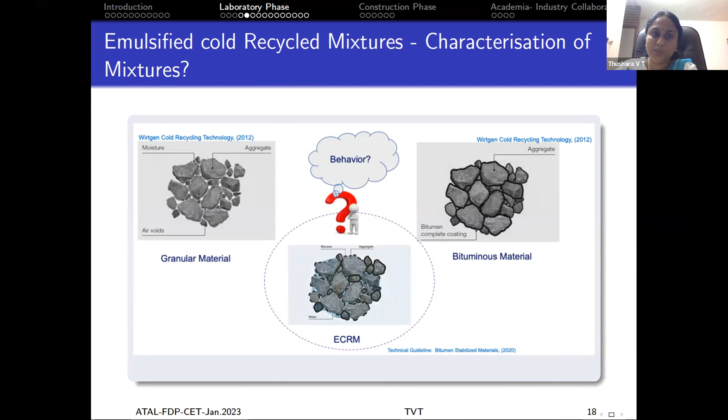The property of the behavior of the ECR mixes have to be explored further. And we need to basically achieve a balanced performance in terms of fatigue as well as rutting performance. So mostly in all bituminous mixes, we have to attain a balance - that is the most challenging thing. It may perform better in rutting, but may fail in fatigue. So how well we achieve that balance between fatigue and rutting performance has to be explored further.

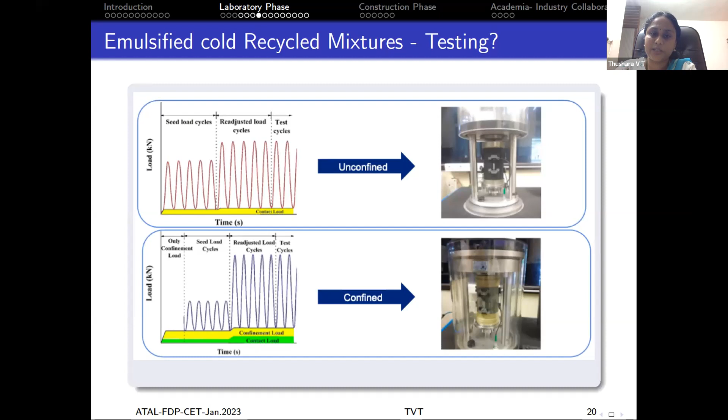For that, what are the different test protocols we have to adopt, especially for emulsified cold mix recycling - which test protocols, such typical material characterization test protocols has to be explored further, so as to correctly identify its property. These aspects will be covered by day 3 second session as well as day 4 first session by Dr. Padmarekha of SRM University, Chennai, as well as Dr. Neethu Roy of MBCET, Trivandrum.

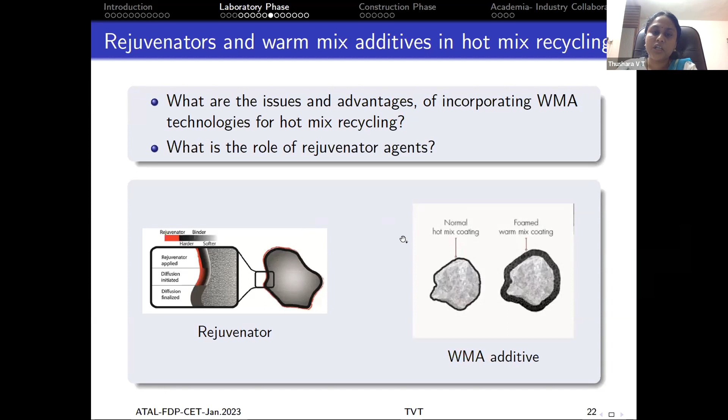Now coming to the various additives, whether it is a rejuvenator as well as warm mix additives in hot mix recycling, there are a lot of issues related to the challenges as well as scope for incorporating such technology in the mixes. So to have a better understanding, we have to get into more detail of the various rejuvenator options - what is actually happening when we are adding a rejuvenator or a warm mix additive? That has to be studied further.

This will be covered by Dr. Asif Ahmed from Ingevity Group, who is in the forefront of implementing many real life projects in India, and also by Dr. Ashalatha, our course coordinator, who will also share the experiences from the student project of CET.

Now, the next step is we need to do a real mix design process. There are various stages involved in the mix design process, whether it be hot mix recycling or cold mix recycling. I'll be discussing some of these aspects. There are many sessions in the offline session related to the mix design part for hot mix as well as cold mix.

The intricacies of RAP mix design will be covered in 2 sessions by Professor Murali Krishnan of IIT Madras, and I'll be doing a real life full design example of hot mix recycling in session 7-2. We also have a presentation by Srijit GH, Deputy Director of Kerala Highway Research Institute, who will talk about the implementation of laboratory mix designs in the field. These are the offline sessions related to the RAP mix design.

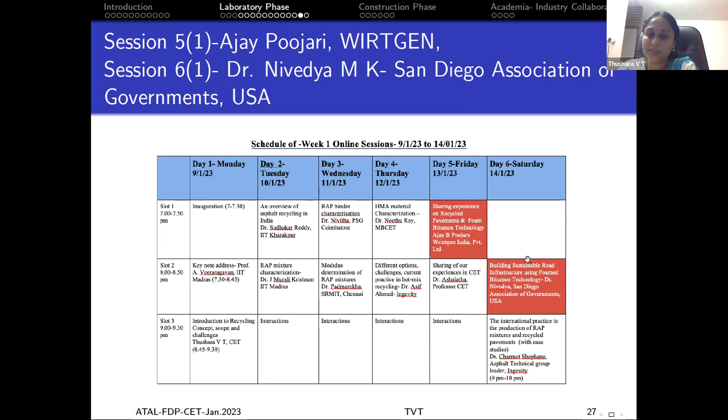Now coming to performance, what about the laboratory performance when we are incorporating RAP in the mixes? Whether the inclusion of RAP will result in more stiffer material, whether the modulus will increase, whether the fatigue performance will increase, will it affect the durability? There are many aspects which can be captured in the laboratory stage, and this will be discussed by some of the PMRF student presentations, who will present their findings related to these aspects.

This is also in the offline session. Now, coming up with how much RAP has to be used, we move to the construction phase. There are limitations for the use of RAP, the implementation of RAP based on plant restrictions as well as processing related to the RAP. There are concerns on how to process the material, whether to fractionize it or not, how to do the stockpiling, how to store it, how to go about the inspection, test plans, auditing schemes, etc. in the actual construction field.

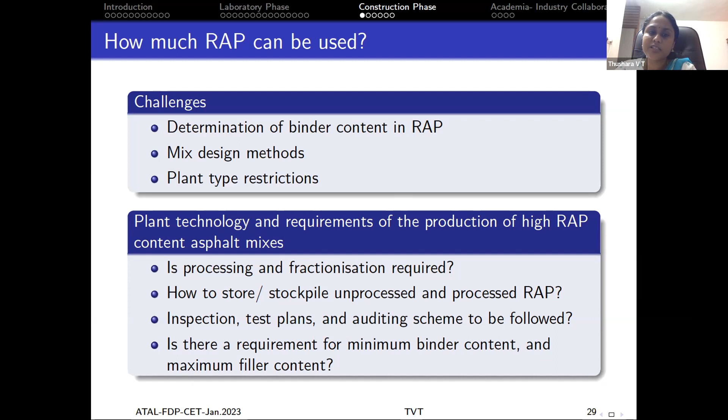And whether we can permit RAP which is having some minimum binder content or maximum, and we have to limit the maximum filler content. Such aspects related to the construction will be covered by different speakers.

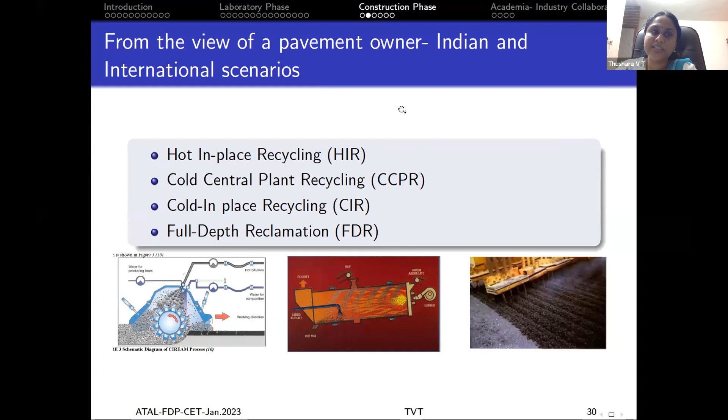From a pavement owner perspective, which of the different options will be feasible or viable for different projects will be discussed, from an Indian scenario as well as international scenario. We have speakers who will be presenting such aspects.

So again, there are queries I have seen related to when to add the rejuvenator, the processing of the RAP, and how to heat the RAP aggregates. Such queries related to construction can be discussed, both related to hot mix as well as cold mix recycling, like when can we go for a wearing course, how much curing is required. Many of such aspects will be covered by the experts.

We have quite a lot of presentations by experts who are working specifically on the implementation side. We have a presentation by Dr. Stephen Chalmers from the Ingenuity Group, who is the Asia production head related to recycling projects. That talk is on Saturday, second session.

For the convenience of his timing, we have slightly changed the schedule, so this particular session will be starting from 9 to 10. We also have other sessions by Professor Anjan Kumar from IIT Guwahati, Professor Samson Mathew, director of NATPAC, a presentation by Sreejith G H from KHRI, and a presentation from Arpan Ghosh, principal consultant of V R Techniche Consultants. Mostly these sessions are offline, except two which are in the online period, with 4 sessions in the offline period.

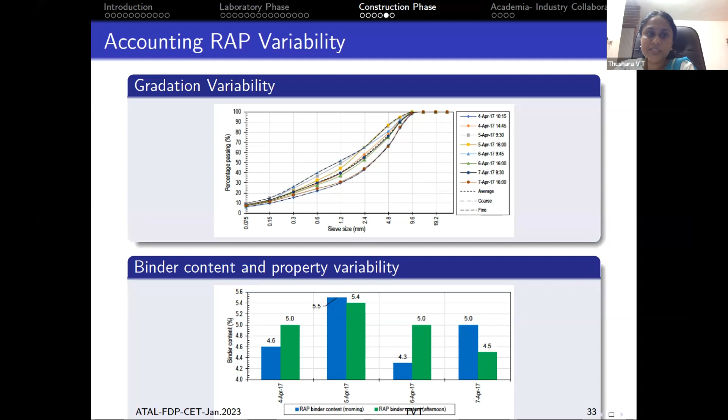Such aspects will be covered in the offline session, first day, session 8, by Dr. Arvind Swamy of IIT Delhi.

Now we have to be aware of the various documents related to recycling projects and the specifications of various countries. Then what should be the order of the SOP related to construction practices. Such things will also be covered in different sessions.

This particular course has a spectrum of participants coming from industry, academia, and research groups. So there is scope for a public-industry working group, and for funded as well as coordinated research and demonstration projects. We have got good support from various industries as well as from the government side to start up various demonstration projects.

Now, what are the policy decisions? We need to come up with policy decisions to incentivize sustainable practices. That is the next stage. Once that happens, automatically the RAP related projects will move to the implementation stage.

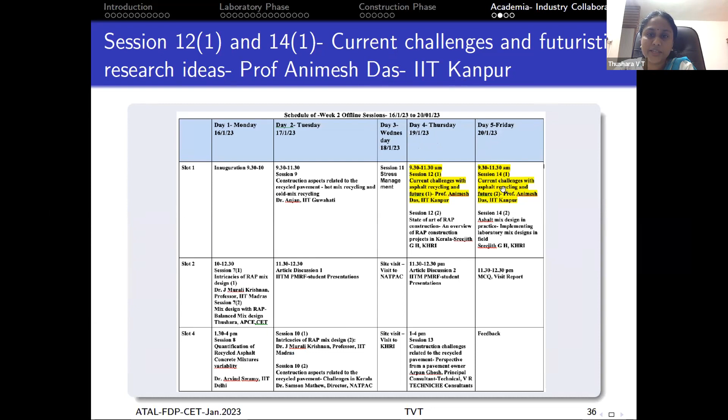So this is the panel of experts we are presenting for the course, and with that, let us work together to push these new technologies for a better India. I hope this course will be beneficial for all the participants. With that, let me wind up this presentation, and for the next 15 minutes we'll keep it open to the participants to raise specific concerns related to the course. Thank you.